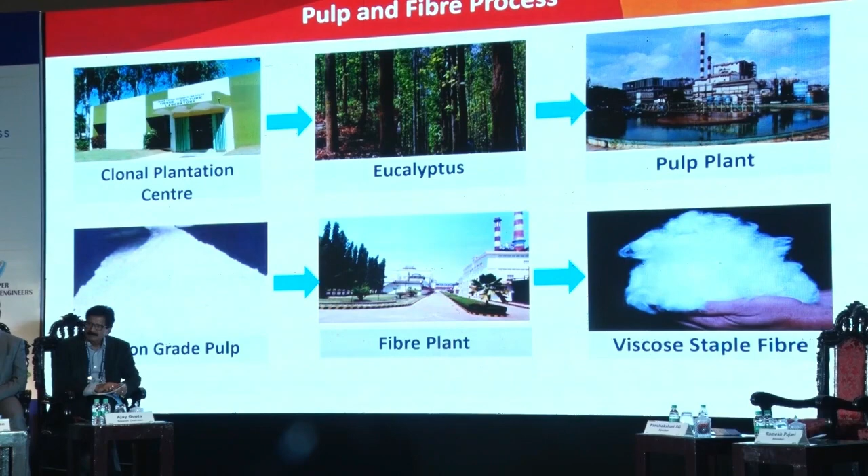So coming to the pulping process, we have our own clonal plantation center where we produce more than 1 crore saplings, distributed to the farmers to grow eucalyptus trees. Over a period of 4 to 5 years, it is harvested and debarked in our depots and then transported to the pulp plant to produce the rayon grade pulp, and the pulp is transported to the fiber plant to produce the viscose staple fiber.

So you know the dissolving grade pulp is very quality conscious, it contains more than 95% alpha cellulose. So for that, the mill practices a pre-hydrolysis kraft cooking process followed by ODL and 5-stage bleaching to produce rayon grade pulp. Pre-hydrolysis liquor is rich in hemicellulose, which is a raw material for biogas production. So we have our own biogas production unit.

With this biogas, we replace 50% of the furnace oil consumption in the lime kiln. For example, every day we are using 14 to 15 tons of furnace oil in the lime kiln, so we replace almost 7 to 8 tons every day. With the black liquor, we produce steam and power, as everyone knows. But we are 95% self-sufficient in steam and power from what we generate in the recovery boiler.

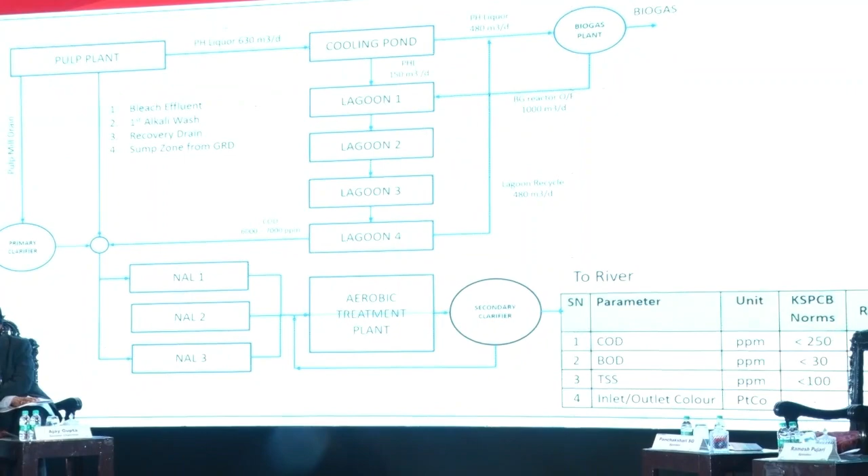The effluent generated from the pulp plant is treated in aerobic lagoons, followed by a biological reactor, and then a secondary clarifier. From the secondary clarifier, we release the effluent to the river Tungabhadra, meeting the KSPCB norms. So what are the KSPCB norms? COD less than 250, we were achieving 230; BOD 30, we are achieving less than 25, 26; TSS less than 100, we are achieving 85.

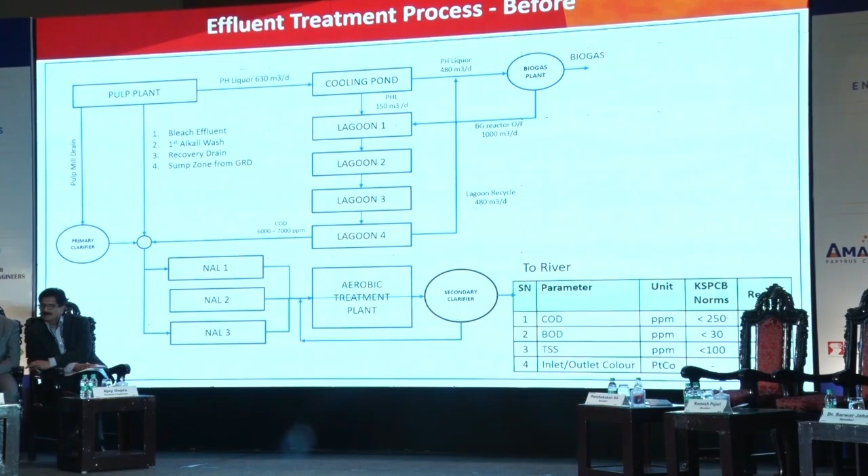So with the thought that we cannot solve our problem with the same level of thinking, we have to solve that problem with another level of thinking. This is a famous quote by Albert Einstein. So with this, my colleague Ramesh Pujar will take you on the journey of how we reduced the effluent color.

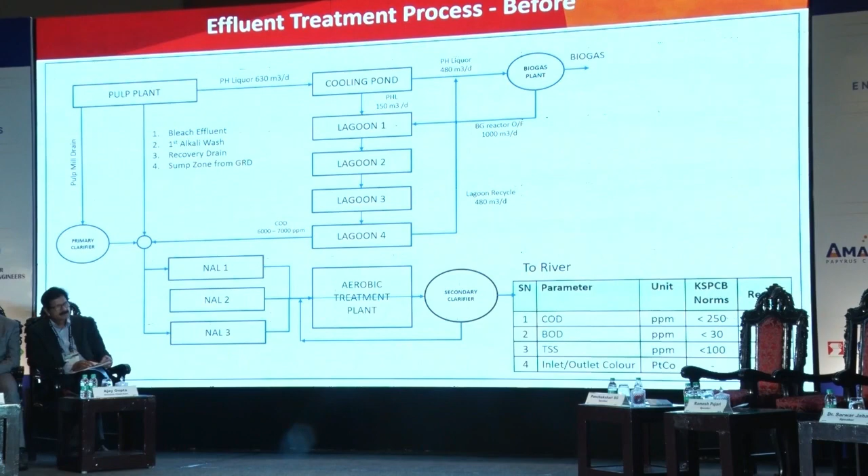Thank you, Panchakshari. Yes.

Discharging treated effluent into the river was a big challenge due to a few issues, even though we were meeting all the norms of the pollution control boards. The first thing is the color of the treated effluent was an aesthetic issue, which was creating an element of doubt about the treatment. This color is mainly due to the presence of residual lignin. And one more issue is the industry was forced to stop for almost 13 days every year during the downstream Jatra festival.

And it was very difficult to run the industry during the river lean flow. Also, there was continuous pressure from society and the statutory body to address this issue. In the long run, the image of the industry could be at stake. But there was no ready-made solution to address the color.

Finally, our team decided to hold a brainstorming session with the concerned department persons, and we came up with a solution to conduct lab trials with the different available color reduction technologies, such as enzyme treatment, ozone oxidation, nanofiltration, carbon adsorption, and chemical treatment.

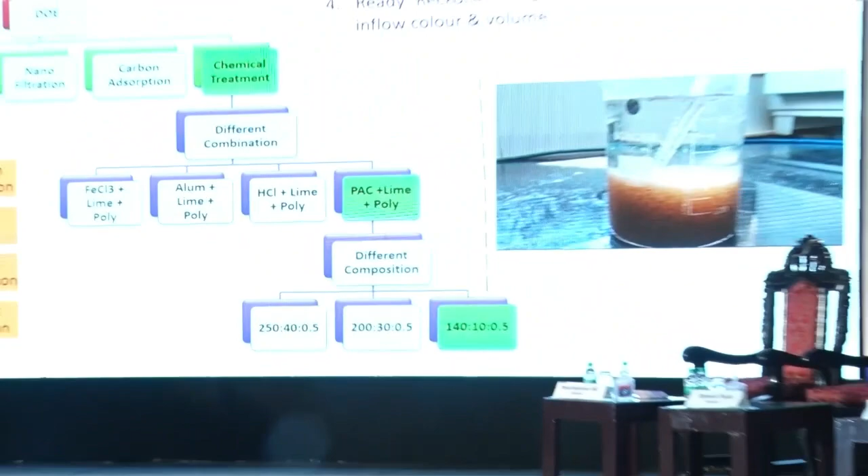Based on this lab trial, we decided to go for the pilot plant scale trial. Finally, the pilot plant scale results were also very encouraging. Then management decided to go for the plant scale. The entire project was designed in-house with a retention time of 3.5 hours. The project estimation cost is around 7 crores, and we completed the entire project within 10 months.

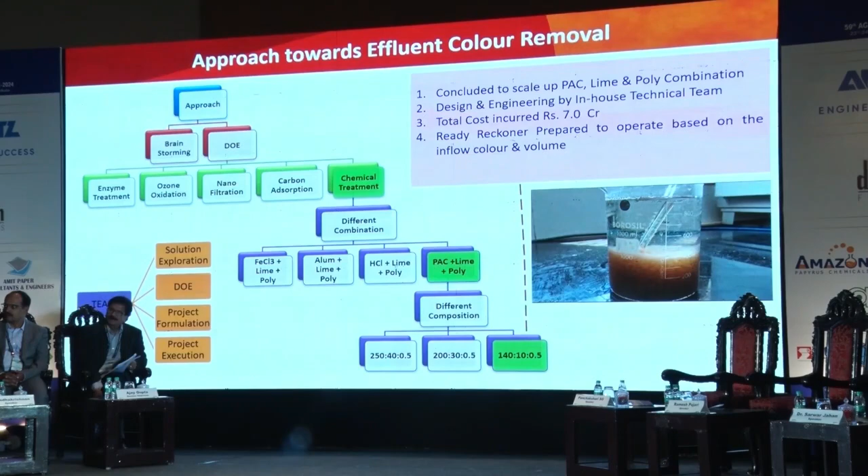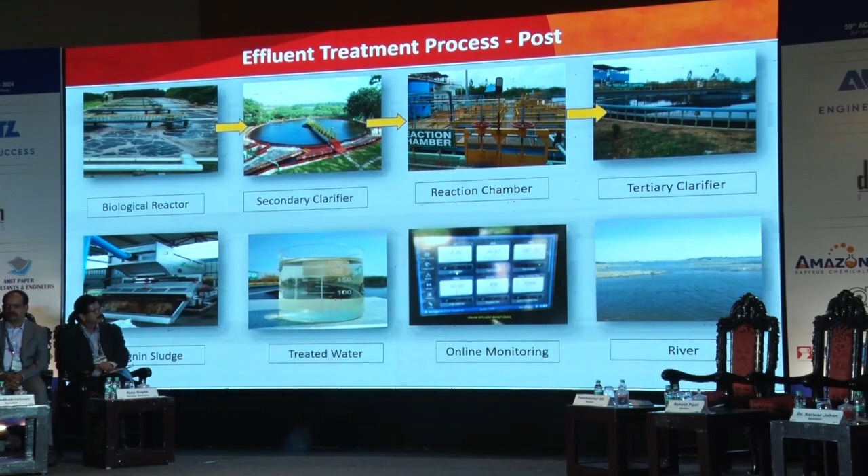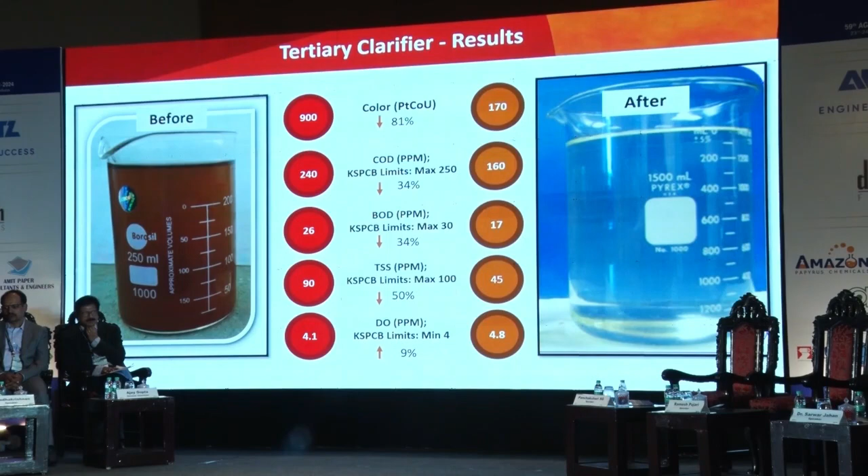You can see the comparison results like COD, BOD. Earlier the color was 900 platinum cobalt. Now we are discharging at 170, almost 81% reduction. COD was 240, now it is 160. BOD was 26, now it is 17. TSS especially, we have achieved more than 50% reduction. Apart from these parameters, you can see the enhancement of dissolved oxygen up to 4.8. It was only 4.1.

After successful implementation of the color removal plant, we faced one more challenge, that is the handling of lignin sludge, because of the high moisture and high quantity of generation. It has a gross calorific value (GCV) of around 2,400 kcal per kg. But due to the high moisture, drying and burning in the CFBC boiler is not economically feasible. So we decided to go for an environmentally friendly process, that is the conversion of lignin sludge into vermicompost. The reason behind this decision is lignin sludge is rich in carbon. It helps to achieve the carbon-nitrogen ratio of 20 to 30 carbon to 1 nitrogen. 25:1 is a very good composition for compost. This vermicompost has very good market value, and it can be blended with any other nutrient.

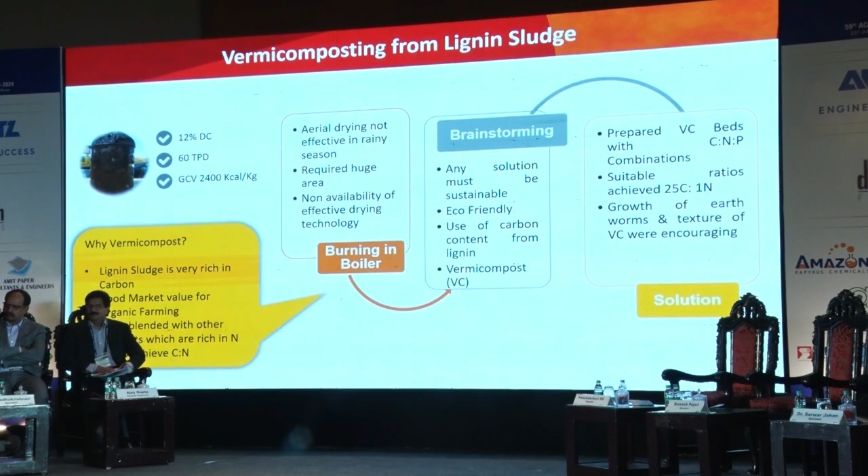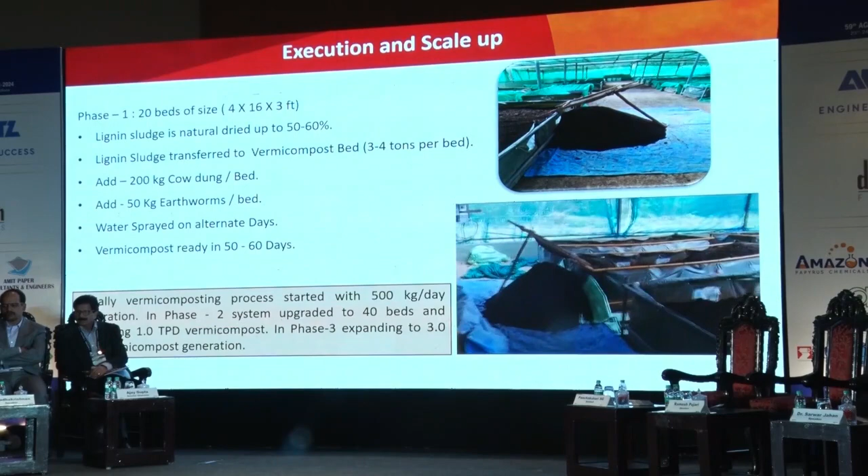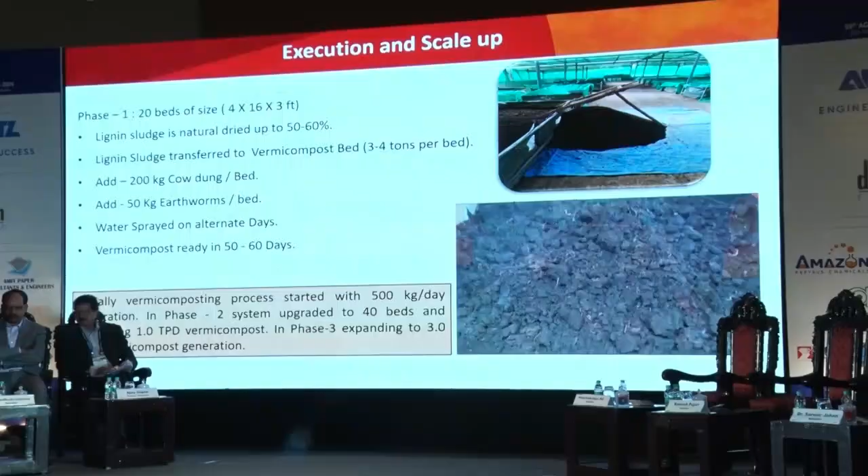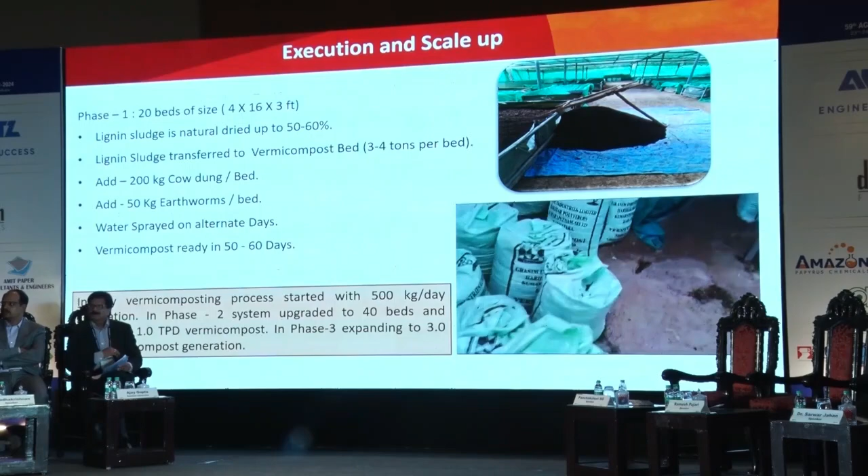Before going for the vermicompost trial, we took some advice from agriculture university experts. As per their advice, we trialed lignin sludge with agriculture waste and with cow dung. Finally, the lignin sludge with cow dung results were very favorable. Initially, we started with 20 vermicompost beds of size 4 x 16 x 3. For each bed, we add around 3 to 4 tons of lignin sludge with 200 kg cow dung and 50 kg of red Eisenia type earthworms. You can see it in the video also. Once weekly the mixing process takes place, and every alternate day we need to spray water.

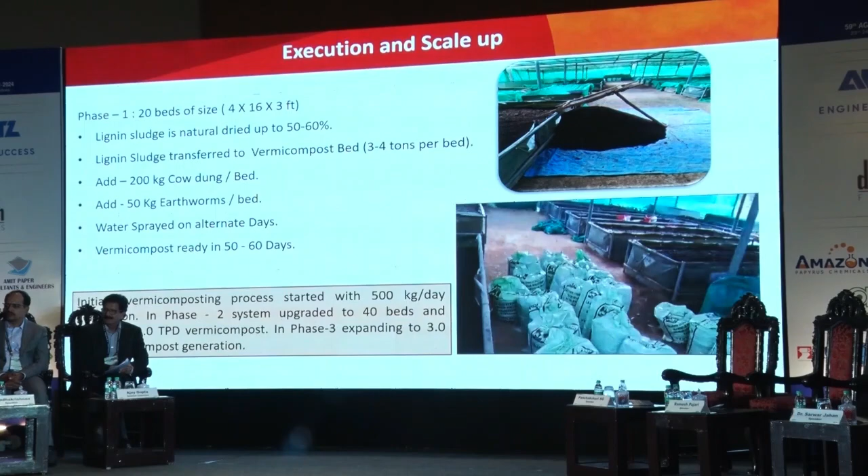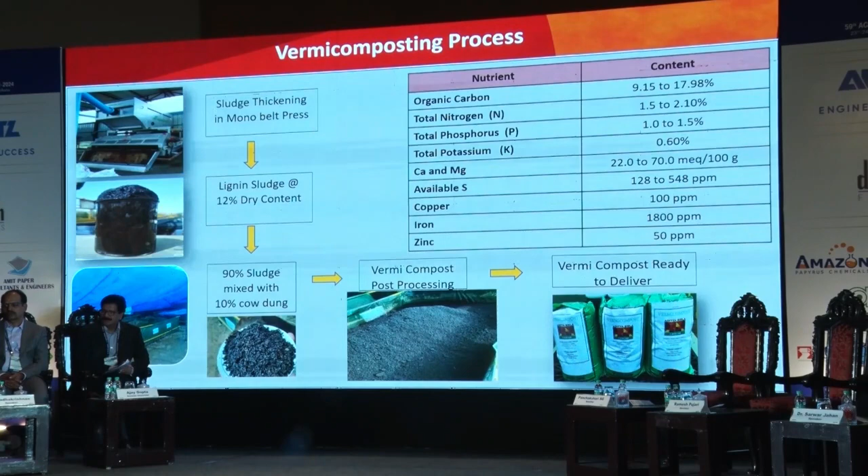This is the nutrient value you can see. Total nitrogen is 1.5 to 2.1, phosphorus is 1.0 to 1.5, and potassium is around 0.6. Apart from these macronutrients, you can see the micronutrients also. In urea and DAP we get only macronutrients, but in vermicompost we get macronutrients as well as micronutrients.